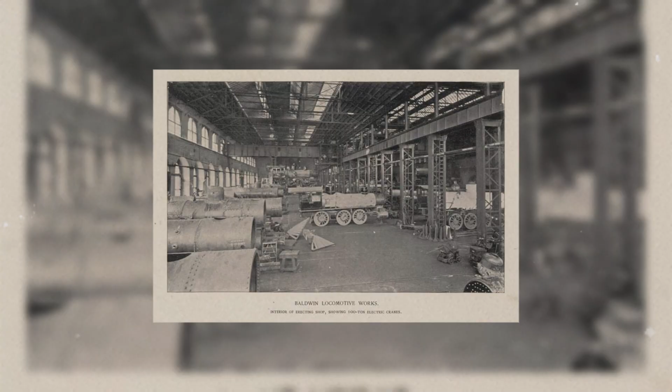Yet within a few short years, the sprawling cathedral of steam was reduced to rotting brick and silent, rusting iron. 18,500 livelihoods vaporized. How does a monopoly so powerful completely derail in the face of a single technological shift? Not because of war, not due to a lack of capital. They were destroyed by their own pride.

This is the story of Baldwin Locomotive Works. A brutal lesson on the devastating cost of arrogance when the future finally comes knocking.

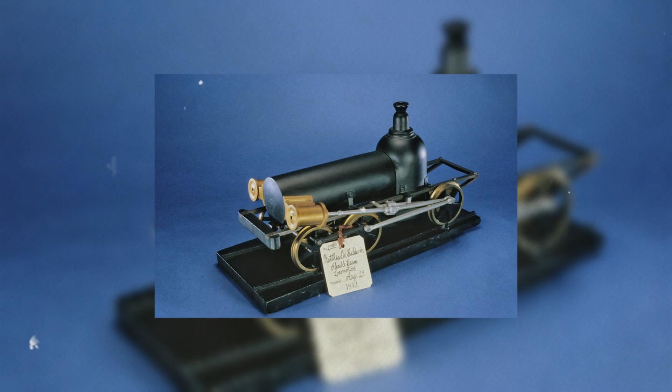The year is 1825, and the streets of Philadelphia are filled with the clatter of horse-drawn carriages and the quiet, meticulous work of craftsmen. In a small shop tucked away in the city, Matthias W. Baldwin sits hunched over a workbench. He is not a titan of industry. He is not an iron worker. He is a jeweler and a watchmaker. His world is governed by magnifying glasses, delicate tweezers, and the microscopic gears of pocket watches. He deals in fractions of a millimeter, obsessed with perfect, harmonious motion.

Yet, within a decade, this maker of delicate trinkets would unleash a mechanical leviathan that would alter the course of American history. The transformation from a watchmaker to a master of heavy industry began not with ambition, but with a practical problem. Seeking to expand his business into manufacturing bookbinders' tools and calico printing cylinders, Baldwin needed reliable power. Human muscle and animal labor were inconsistent.

Steam power was the emerging force of the era, but the stationary steam engines available on the market were clumsy, inefficient, and prone to breaking down. Offended by their crude engineering, Baldwin decided to build his own. In 1829, he constructed a small, stationary steam engine for his shop. It was an absolute marvel of precision.

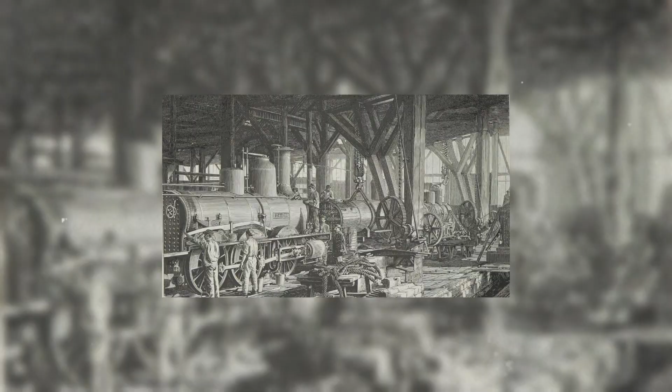Unlike the roaring, rattling machines of his contemporaries, Baldwin's engine hummed with the quiet, flawless rhythm of a well-crafted clock. It was so efficient and beautifully engineered that neighboring businesses began clamoring for their own. Almost by accident, Matthias Baldwin had become a builder of steam engines. But the true pivot of his life and the genesis of a transportation empire came a year later.

Across the Atlantic, the British were experimenting with a terrifying and wondrous new invention, the steam locomotive. Rumors of these iron horses reached America, capturing the public's imagination. In 1831, the Philadelphia Museum approached Baldwin with a novel request. Could he build a working miniature locomotive for an exhibition?

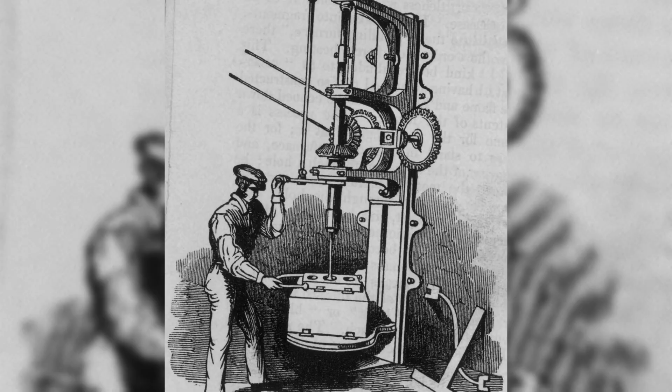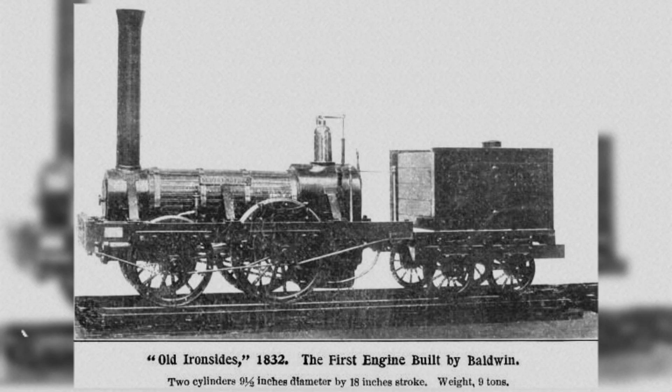Relying only on vague descriptions and crude sketches of British designs, Baldwin applied his watchmaker's precision to the task. He built a small, fully functional steam locomotive that pulled 2 passenger cars on a circular pine-board track inside the museum. It was a sensation. Crowds flocked to see it, mesmerized by the hissing, chugging miniature.

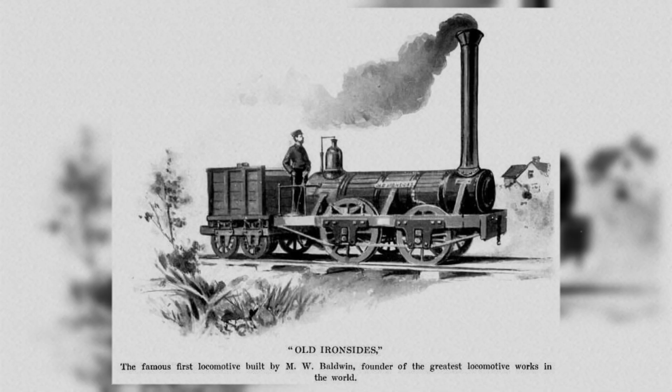Among those watching were the directors of the newly formed Philadelphia, Germantown, and Norristown Railroad. They were laying tracks, but they had a critical problem. They had no trains, relying instead on horses to pull carriages along the rails. They looked at Baldwin's toy and saw the future. They approached the jeweler with a staggering proposition. They wanted him to build a full-scale, operational steam locomotive.

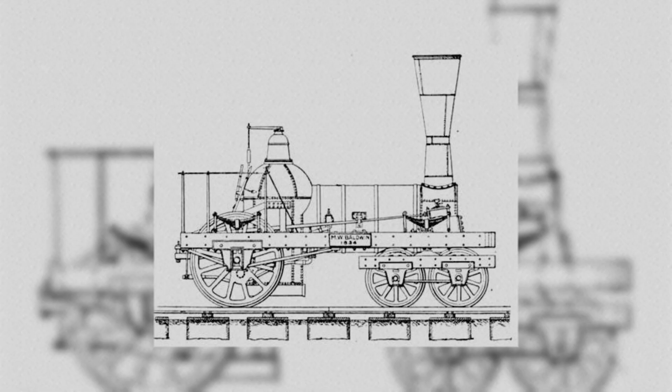It was a seemingly impossible task. The leap from a museum model to a multi-ton machine capable of hauling heavy loads over uneven terrain was monumental. In the early 1830s, America lacked the industrial infrastructure to build such a beast. There were no specialized machine shops. There were no standardized blueprints. There was not even a proper forge capable of casting the massive iron cylinders required.

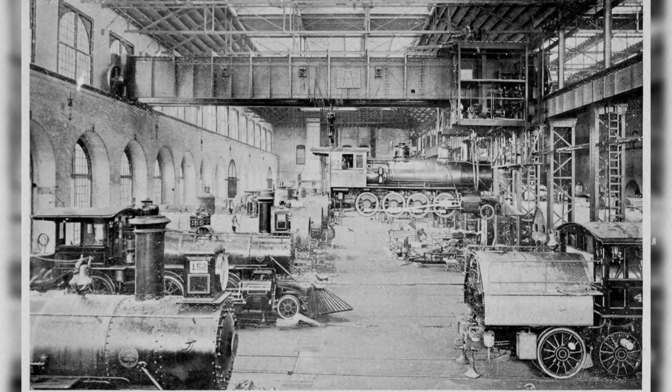Baldwin accepted the challenge, plunging into a grueling physical and mental ordeal. Because the necessary tools did not exist, he had to invent them. He trained blacksmiths to become specialized mechanics. He designed his own boring machines to hollow out the iron cylinders. He worked day and night in a cramped alleyway shop, struggling against the limitations of early metallurgy and primitive hand tools. The sheer physical toll of wrestling with massive iron components was a brutal contrast to the delicate watchmaking he had mastered.

Finally, on November 23, 1832, the machine was ready. He named it Old Ironsides. It weighed over 5 tons. It was a beautiful, terrifying amalgamation of iron, wood, and brass.

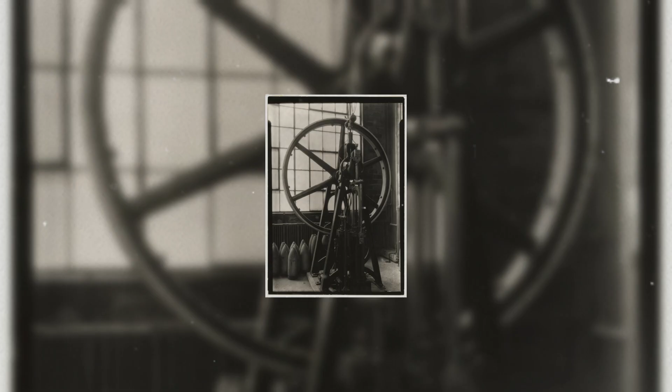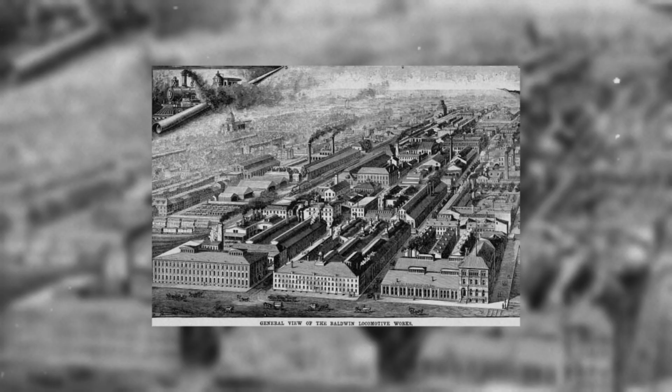On its trial run, things did not go smoothly. The day was damp, and the iron wheels slipped uselessly on the wet rails. The exhaust pipe was too small, choking the engine's draft. Yet with adjustments, the fire caught, the pressure built, and Old Ironsides moved. On subsequent runs, it achieved speeds of 28 miles per hour, an unimaginable velocity in a world accustomed to the walking pace of a horse.

Despite the triumph, the process had been a nightmare of logistical and engineering failures. Exhausted, out of pocket, and deeply frustrated by the sheer difficulty of the endeavor, Baldwin famously declared, "That is our last locomotive. I will never make another." But the undeniable thrill of seeing his creation conquer distance and time had taken root. He had proven that American ingenuity could rival the British masters.

He had taken the precision of a watchmaker and scaled it up to a monstrous, world-changing proportion. He would not stop at one. Matthias Baldwin had found his true calling. He abandoned jewelry and stationary engines entirely, dedicating his life and his shop to the perfection of the steam locomotive. In doing so, he embedded a unique DNA into his company, a fanatical commitment to custom craftsmanship and mechanical precision.

This obsession with quality would soon propel Baldwin Locomotive Works from a cramped alleyway into a sprawling industrial colossus, setting the stage for an era of unprecedented dominance. Matthias Baldwin did not live to see the true scale of the monster he had birthed. When he passed away in 1866, his company had already established itself as a premier builder of steam locomotives. But the decades that followed would transform the Baldwin Locomotive Works from a successful enterprise into a global monopoly.

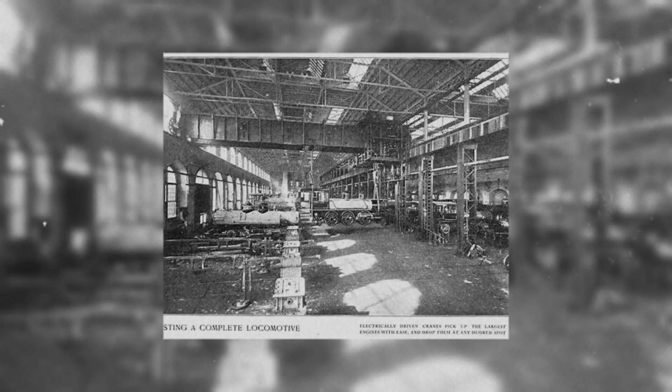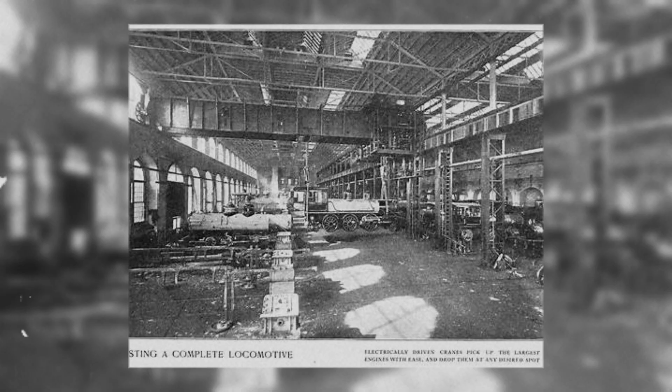A Baldwin locomotive chugging across the Russian steppes, the French countryside, or the mountains of Japan was the ultimate symbol of American industrial might. They reached a point where the name Baldwin was printed on over 70,000 locomotives globally. They were invincible. They were the heartbeat of global logistics.

But beneath the roaring triumph of the Eddystone plant lay a fatal, hidden flaw. The very thing that made Baldwin the undisputed master of its domain was quietly weaving the trap that would eventually destroy it. Eddystone was a masterpiece of hyper-specialization. Every square inch of the 600-acre facility, every massive overhead crane, every specialized boring machine, and every drop forge was designed exclusively for the creation of steam locomotives. The architecture of the buildings themselves was dictated by the sheer physical dimensions of steam boilers.

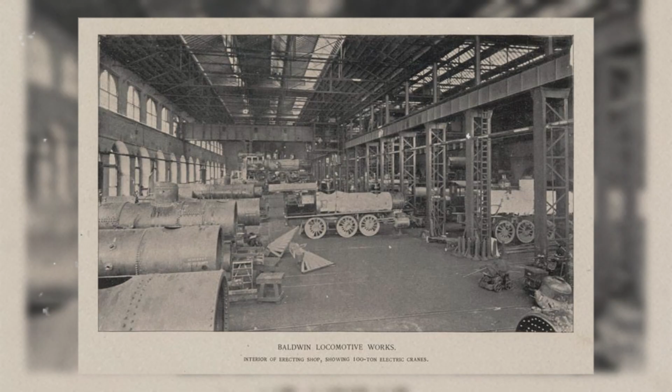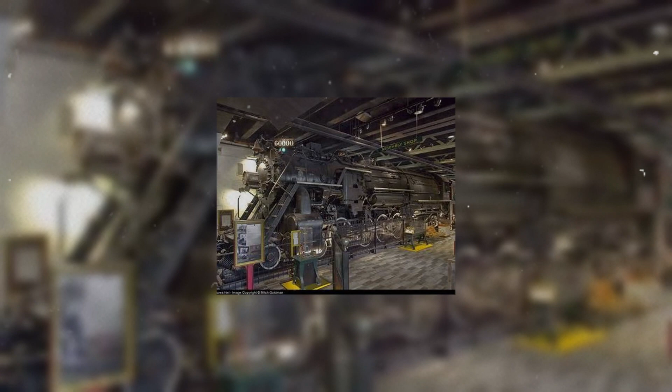More dangerously, the mindset of the entire organization, from the executives in the boardroom to the riveters on the shop floor, was completely calcified in the doctrine of steam. They believed that raw, brute force, generated by boiling water and burning coal, was the only way to move heavy freight. They viewed their product not merely as a machine, but as the pinnacle of human engineering, a living, breathing beast of burden that could never be replaced by something less primal.

They had built a fortress so massive, so incredibly optimized for a single technology, that it was utterly incapable of pivoting. Eddystone was a titan wearing an impregnable suit of iron armor. It was magnificent, it was terrifying, and it was entirely rigid. As the 1930s approached, a new, quieter sound began to echo in the distance. The low, steady hum of internal combustion. But within the deafening, triumphant roar of the Eddystone Cathedral, the leaders of Baldwin simply could not, or would not, hear it.

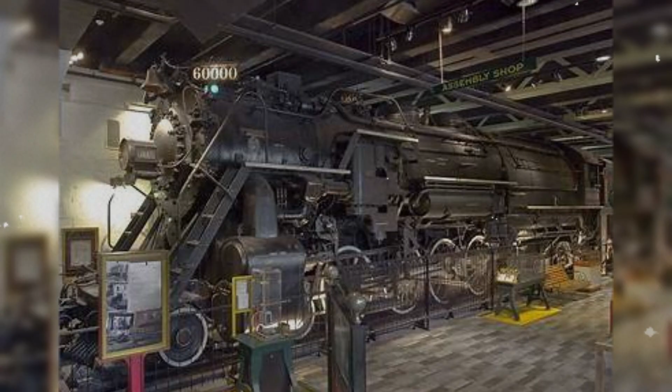The 1930s brought profound economic despair to America, but beneath the surface of the Great Depression, a quiet technological earthquake was taking place. While the mighty Eddystone plant continued to hammer away at massive iron boilers, filling the Pennsylvania sky with thick, black smoke, a very different kind of sound was emerging from the American Midwest. It was not the deafening, violent roar of escaping high-pressure steam, but the steady, rhythmic, almost surgical thrum of the internal combustion engine.

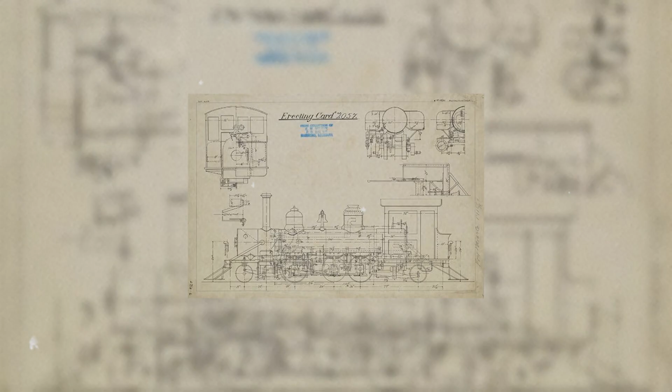General Motors, a titan of the rapidly expanding automotive industry, had begun looking beyond highways and turning its gaze toward the rails. In 1930, GM purchased the Winton Engine Company and the Electromotive Engineering Company, fusing them into a new, heavily funded subsidiary, the Electromotive Division, or EMD. This was a critical shift.

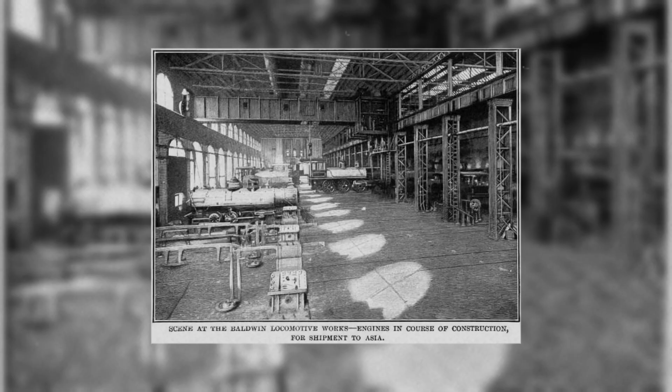EMD was not a traditional locomotive builder steeped in the romantic traditions of the railroad. They were a car company. They brought a cold, calculated mass production logic to heavy transit, a philosophy that was entirely alien to the bespoke craftsmanship of Baldwin. The true shockwave of this new philosophy hit the American public in the spring of 1934.

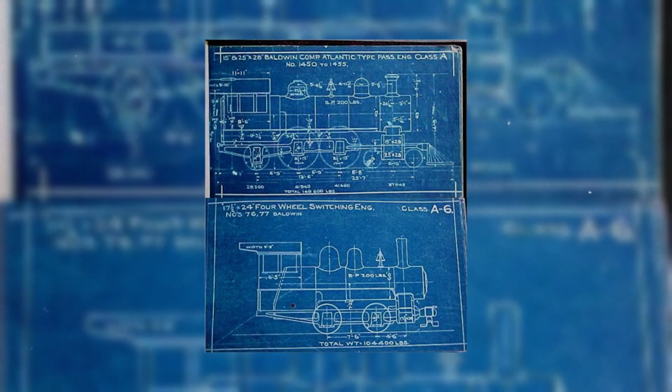The Chicago, Burlington, and Quincy Railroad debuted a machine that looked less like a train and more like a silver bullet dropped out of a science fiction novel. It was the Burlington Zephyr. Sheathed in gleaming, fluted stainless steel, the Zephyr was powered not by coal and water, but by a compact, highly efficient diesel-electric power plant.

On May 26, 1934, the Zephyr made a historic, non-stop, dawn-to-dusk dash from Denver to Chicago. It covered 1,015 miles in 13 hours and 5 minutes, effectively cutting the traditional steam-powered travel time in half. But the speed was not the most terrifying metric for the traditional locomotive builders.

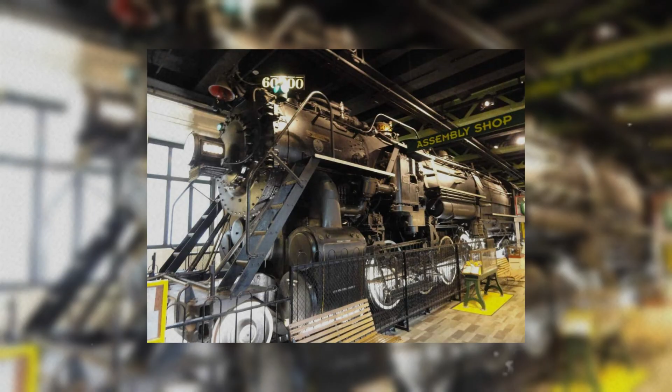It was the efficiency. The entire 1,000-mile journey cost a mere $14.64 in diesel fuel. For a steam locomotive to attempt that same run, it would have required frequent, time-consuming stops for tens of thousands of gallons of water, mountains of shoveled coal, and exhaustive mechanical lubrication at every division point.

Steam engines were inherently dirty, maintenance-heavy beasts. They required an army of ash pit workers, specialized boiler makers, and roundhouse mechanics just to keep them breathing. They spent a massive percentage of their operational lives sitting cold in the shop, undergoing legally mandated boiler washes and firebox repairs. The diesel, by contrast, offered something revolutionary: pure availability.

You turned a switch, and it was ready to work. There were no ashes to dump, no boilers to wash, no fires to carefully bank and maintain overnight. It was clean. It was precise. It was undeniably the future of transportation.

How did the undisputed kings of Eddystone react to this gleaming silver interloper? With profound, unshakable arrogance. Within the mahogany-paneled boardrooms and the cavernous drafting floors of Baldwin Locomotive Works, the men who had spent their lives mastering the violent alchemy of boiling water looked at the diesel engine and sneered. To them, the Zephyr was a public relations gimmick.

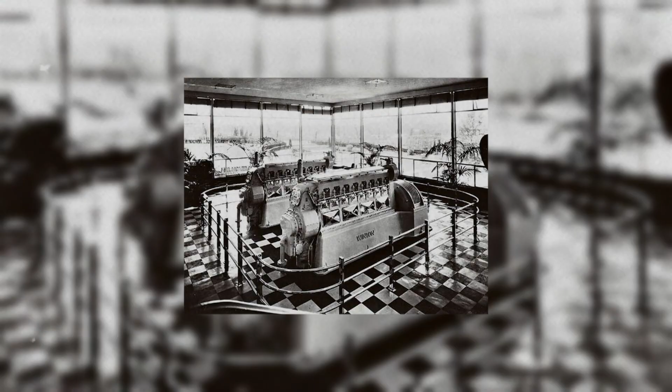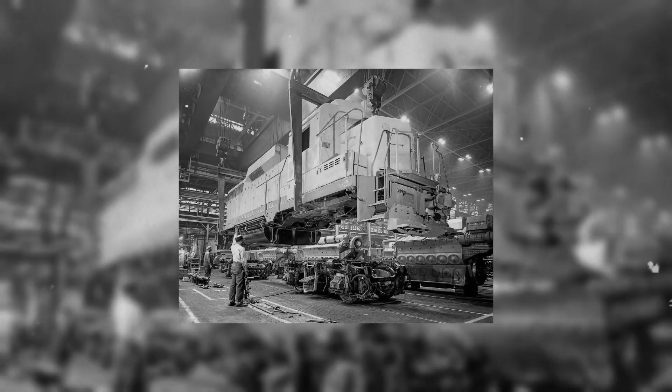It was a fragile, overly complicated toy fit only for lightweight, high-speed passenger trains, but entirely incapable of doing the real work of America. The prevailing, unquestioned dogma at Baldwin was that true railroading, the brutal, grinding labor of hauling 10,000-ton coal drags up steep mountain grades, required raw muscular mass. The Baldwin executives believed, with a religious fervor, that the intricate electrical circuits, delicate fuel injectors, and complex wiring of a diesel-electric locomotive could never survive the punishing daily abuse of heavy freight service.

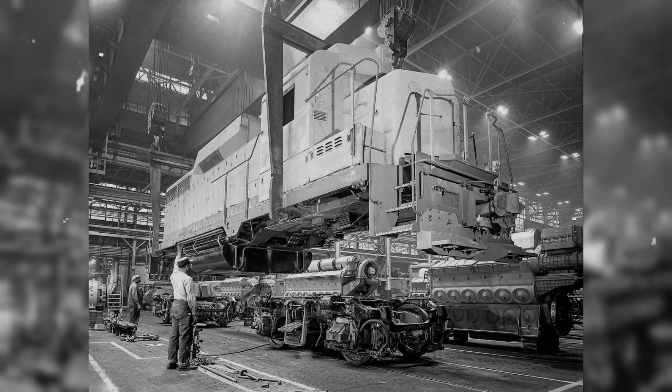Furthermore, the threat of diesel assaulted the very foundation of Baldwin's business model. For nearly a century, Baldwin had operated on the philosophy of bespoke, custom engineering. Every railroad wanted its own uniquely designed steam engine, tailored exactly to its specific track radii, bridge weight limits, and regional coal types. The engineers at Baldwin prided themselves on being able to design and build anything a railroad requested.

EMD, however, was offering standardized, off-the-shelf models. You bought what they made. Baldwin's leadership firmly believed that veteran railroad executives would never accept generic, mass-produced machines. They actively mocked the new technology.

The brilliant but aging architects of Baldwin's supremacy publicly dismissed the threat, assuring investors and railroad men alike that steam would reign supreme until the end of time. Instead of pivoting, they doubled down on their own magnificent obsolescence. They poured millions of dollars and countless engineering hours into developing even more massive, more complicated steam locomotives, experimental duplex drives, and steam turbine engines that were undeniable mechanical marvels, but absolute economic nightmares to maintain.

The engineers at Baldwin were men of iron and steam. They understood direct mechanical linkage, steam pushing a piston, driving a steel rod, turning a massive wheel. Pure, visible, visceral physics. The idea of an engine generating unseen electricity to turn traction motors felt like an unnecessary, weak middleman. They were plugging their ears against the ticking clock, willingly blinding themselves to the data that proved diesel's superior economic efficiency. The trap of their own century-long success had closed perfectly around them. Their pride had rendered them inflexible.

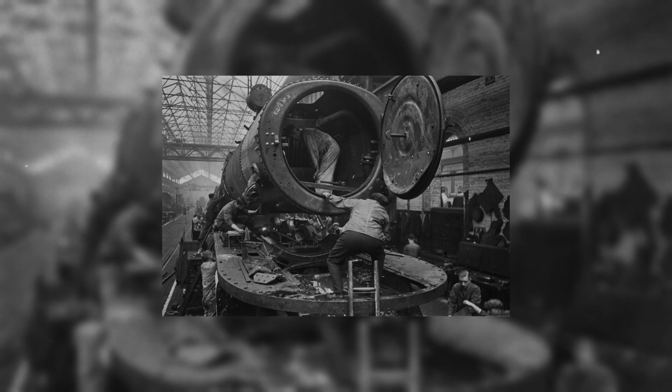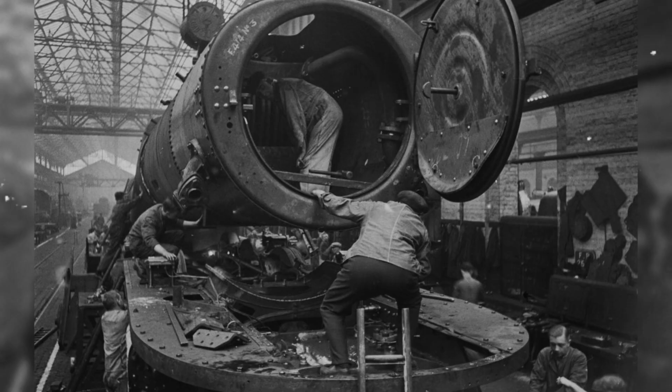The Eddystone plant, which had been suffering through the lean years of the Great Depression, was suddenly resurrected to its most terrifying and magnificent scale. The foundries burned 24 hours a day, 7 days a week. The workforce swelled back into the tens of thousands. The sky above Pennsylvania turned black with coal smoke as a relentless parade of heavy, articulated steam behemoths rolled out of the erecting shops. Baldwin was churning out massive engines not just for American railways, but for the Soviet Union, for Great Britain, and for the United States Army Transportation Corps.

To the executives sitting in the mahogany boardrooms of Philadelphia, the diesel threat of the 1930s now seemed like a foolish, distant memory. The sleek Silver Zephyr was a cute novelty, but when the fate of the free world was on the line, the United States government had turned to the brutal, undeniable muscle of Baldwin steam. The order books were overflowing. Revenues were shattering historical records.

By 1944, as the tide of the war turned definitively in favor of the Allies, the atmosphere within Baldwin's leadership was one of supreme, unshakable triumph. In their minds, the debate was settled. Steam had won. At a lavish executive gathering, senior management raised glasses of expensive champagne, toasting to record profits, overflowing production quotas, and the glorious return of their golden age. They clinked their glasses to the roaring fires of Eddystone, utterly convinced that their century-old dynasty was secure for another 100 years.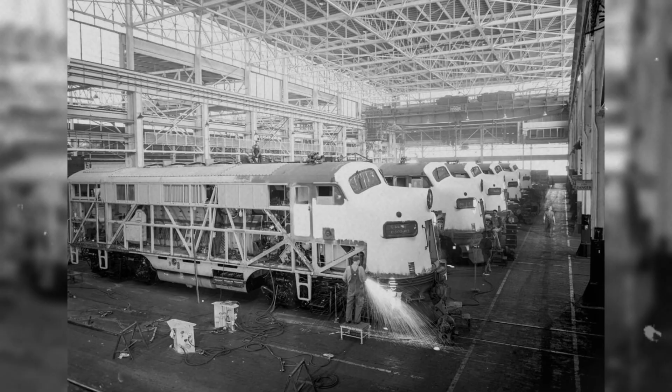When Japan formally surrendered in September 1945, the illusion of Baldwin's wartime triumph shattered almost overnight. The lucrative government contracts for heavy steam engines vanished instantly. The domestic railroads, physically exhausted and financially enriched by the war traffic, were desperate to modernize their fleets. They did not want to replace their worn-out steam engines with new steam engines. They had seen the incredible efficiency, the massive fuel savings, and the minimal maintenance of the EMD diesels that had operated during the war. The railroad executives abandoned Eddystone and flocked to Illinois.

The leaders of Baldwin Locomotive Works woke up in the autumn of 1945 to a terrifying reality. The war had not saved them. It had anesthetized them. The booming production numbers had served as a narcotic, blinding them to the truth. While they had spent 4 grueling years perfecting the technology of the past, their greatest rival had been quietly, legally, and brilliantly handed the keys to the future. The champagne had barely dried in the Baldwin boardrooms when the catastrophic truth finally set in. The era of steam was dead, and they were caught completely empty-handed. The awakening was brutal.

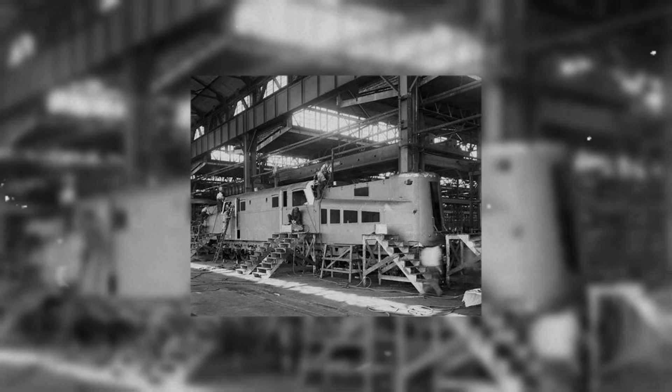By 1946, the massive backlog of wartime steam orders had evaporated, and the American railroad industry made its intentions violently clear. They were not returning to the heavy, ash-choked days of steam. They wanted the sleek, efficient, turnkey power of diesel-electric locomotives. Electromotive Division, having spent the war years perfecting their standardized assembly lines, was positioned to immediately fulfill that demand.

Baldwin Locomotive Works, the undisputed titan of the previous century, was caught completely flat-footed. Panic, unfamiliar and cold, set into the executive suites of the Eddystone plant. The men who had arrogantly dismissed the internal combustion engine a decade earlier were now forced into a humiliating, desperate scramble for survival. They had to pivot, and they had to do it immediately.

But a century of institutional muscle memory cannot be erased overnight. Baldwin was not a company designed to build delicate, highly calibrated electrical machines. They were a company built on the brutal, heavy physics of iron, fire, and water. Their entire massive infrastructure, the drop forges, the boiler shops, the colossal overhead cranes, was optimized for steam.

To bridge the catastrophic gap in their expertise, Baldwin attempted a rushed, messy marriage of convenience. They utilized diesel prime movers from their subsidiary, De La Vergne, and contracted the Westinghouse Electric Corporation to supply the vital traction motors and electrical control systems. On paper, it seemed like a formidable alliance of heavy industry. In reality, it was a logistical and cultural nightmare.

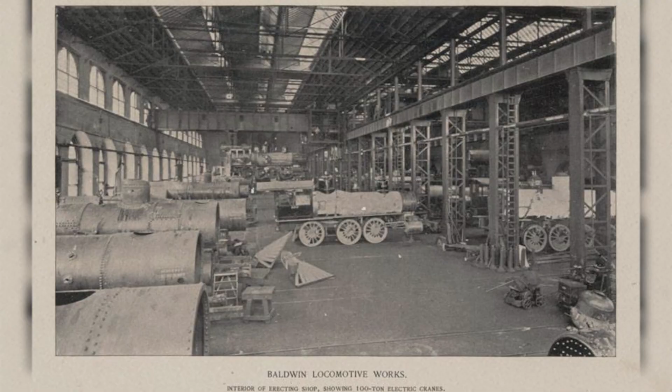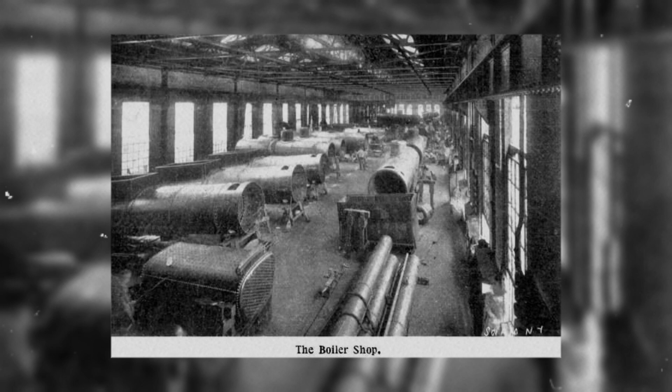The most profound tragedy of this pivot unfolded on the shop floor of the Eddystone plant. For generations, the Baldwin workforce had been composed of master artisans of heavy metallurgy. These were boilermakers, blacksmiths, and foundrymen who understood the language of glowing steel and high-pressure steam. They diagnosed mechanical issues by the sound of a rhythmic clank or the smell of hot lubricating oil.

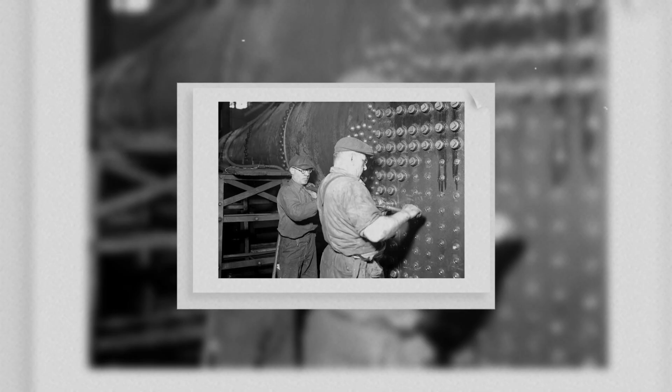Suddenly, these veteran mechanics were handed complex electrical schematics. They were asked to abandon their heavy tools and work with delicate wiring harnesses, temperamental voltage regulators, and sensitive fuel injectors. The transition was agonizing. A master boilermaker, a man who could seamlessly rivet a high-pressure vessel capable of containing hundreds of pounds of steam, was essentially reduced to an unskilled laborer when faced with the baffling intricacies of a diesel-electric control panel.

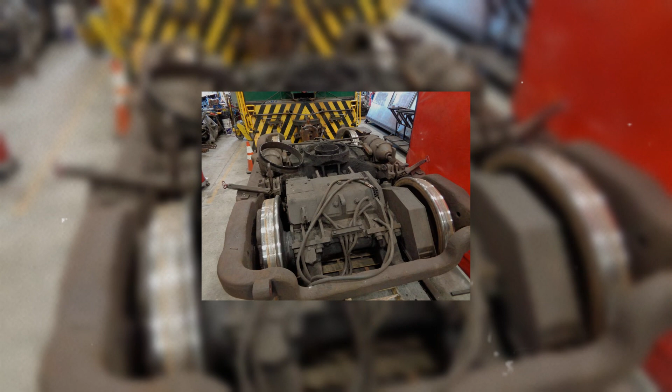The factory floor, once a symphony of organized, rhythmic pounding, descended into an atmosphere of anxious confusion. They were attempting to force a modern, precision-engineered machine through a manufacturing process built for the raw, brute force of the 19th century. The resulting locomotives reflected this profound internal conflict. They were massive, heavily built, and intricately complex. Machines designed by steam engineers desperately trying to speak the language of diesel.

When Baldwin's new diesel locomotives finally rolled out of Eddystone and onto the main lines, the results were disastrous. Driven by their century-old philosophy of custom engineering, Baldwin refused to adopt the standardized, mass production model that was making EMD so successful. Instead of offering a few reliable, interchangeable models, Baldwin offered a bewildering array of custom-built diesels. They built massive, terrifyingly complex machines like the Centipede, a hulking locomotive with 24 wheels, 2 separate diesel engines, and a sprawling, labyrinthine electrical system.

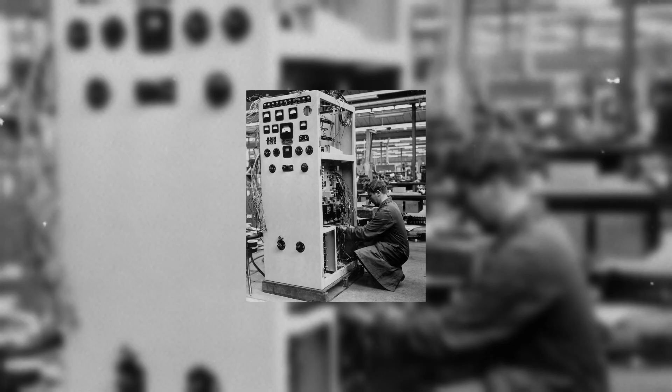To the traditional railroad executives, these machines looked impressive, but to the maintenance crews working in the rail yards, they were an absolute nightmare. Baldwin's diesels were plagued by constant electrical gremlins and mechanical failures. Because they were custom-built, replacement parts were incredibly difficult to source. If a Westinghouse electrical relay failed on a Baldwin locomotive in a remote rail yard in Texas, the train was out of service for days, sometimes weeks, waiting for a specific, non-standardized part to be shipped from Pennsylvania.

Furthermore, the internal layout of the machines was notoriously cramped and hostile to mechanics, reflecting the fact that they were designed by draftsmen who didn't fully understand the maintenance realities of diesel-electric power. By contrast, EMD's locomotives were designed like automobiles. Their parts were universally standardized. A traction motor from an EMD locomotive in New York was identical to one in California. If an engine failed, a railroad maintenance crew could swap out the entire prime mover in a matter of hours, keeping the train on the tracks and generating revenue.

The economic reality was undeniable, and the market response was swift and merciless. Railroads that had been fiercely loyal to Baldwin for nearly 100 years began to defect. The most devastating blow came from the Pennsylvania Railroad. The Pennsy was the largest railroad in the world, and for decades, it had been Baldwin's most important and captive customer. The two Pennsylvania-based giants had been locked in a symbiotic relationship, building some of the most famous steam locomotives in history together.

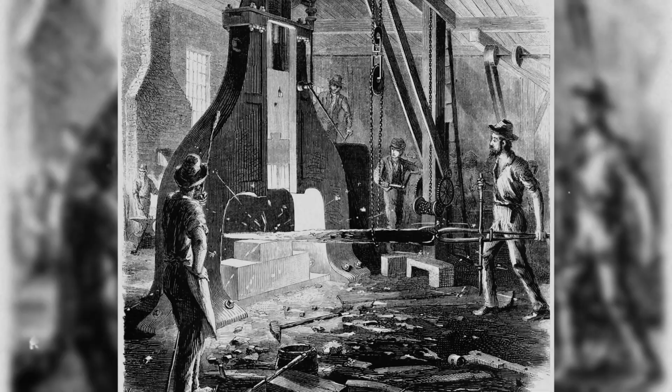forever. But the corporate restructuring was merely a tourniquet. It did nothing to cure the underlying disease. The core, fatal problem remained utterly unsolved. BLH still did not possess a reliable, competitive diesel locomotive, and the domestic railroad market was already fiercely saturated by EMD and the American Locomotive Company.

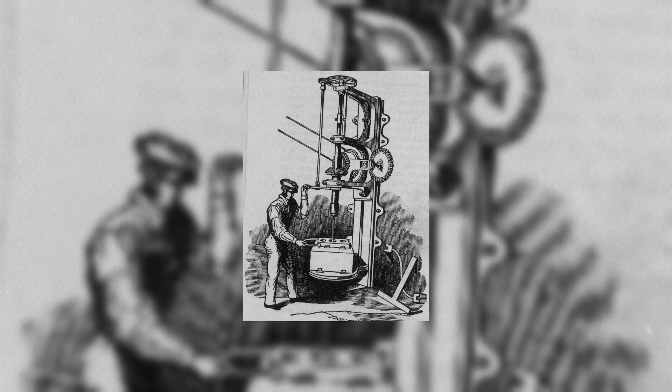Realizing that they could no longer survive as a dedicated railroad supplier, the executives at BLH initiated a frantic, scattershot strategy of diversification. If the railroads no longer wanted their machines, they would use the massive foundries and heavy tooling of Eddystone to build anything that required thick steel and deep engineering.

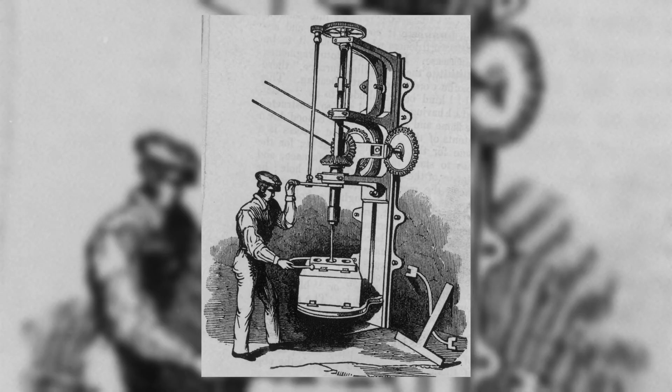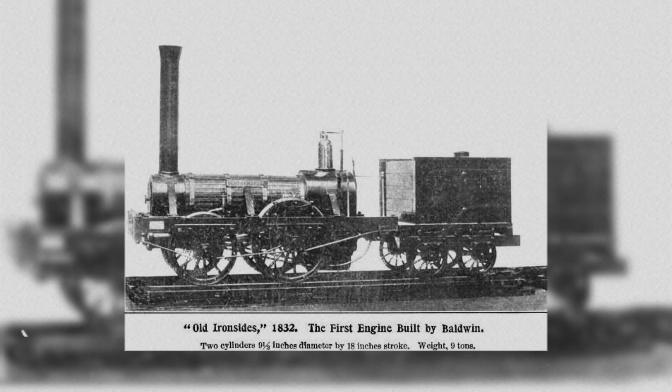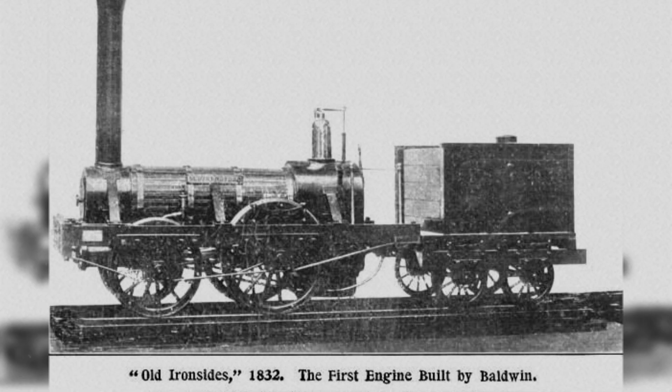The mighty Locomotive Works pivoted to manufacturing heavy earth-moving equipment, massive hydraulic turbines for hydroelectric dams, ship propellers, road graders, and colossal metal-forming presses. They were desperately trying to feed a beast that possessed an insatiable, ruinous appetite for work. But in doing so, they stripped the company of its soul. The men who had proudly viewed themselves as the world's finest builders of motive power were now relegated to stamping out generic, faceless industrial hardware.

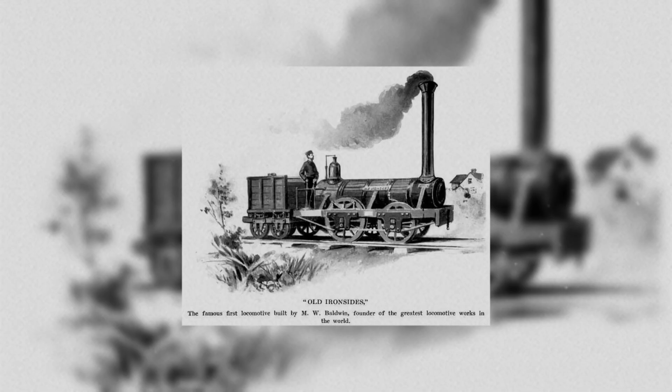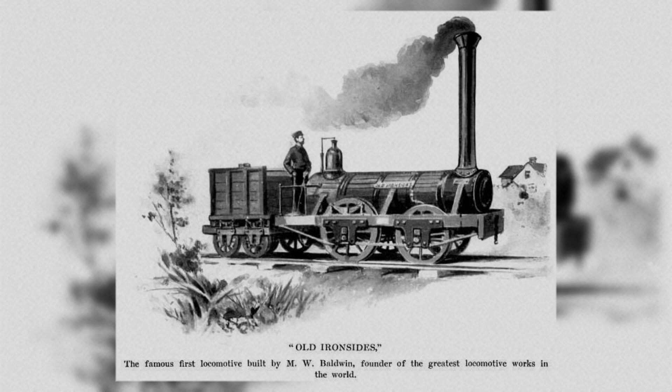Despite the frantic pivot to heavy industrial machinery, the unforgiving mathematics of Eddystone simply did not work. Building a custom hydroelectric turbine was a profitable endeavor, but it was a slow, meticulous process that only required a fraction of the manpower needed to run a high-volume locomotive assembly line.

The mighty army of Eddystone, which had once numbered 18,500 strong, suddenly morphed from an asset into a massive, unsustainable liability. The layoffs, when they came, were not the cyclical, temporary furloughs that the workforce had endured during the Great Depression. These were permanent, soul-crushing terminations. Generation after generation of Baldwin men were handed pink slips and shown the gate.

Fathers who had proudly walked their sons into the foundry, passing down the sacred, tactile knowledge of heavy metallurgy, now had to watch those same sons pack their toolboxes and walk out into a cold, unforgiving post-war economy. The psychological devastation was profound.

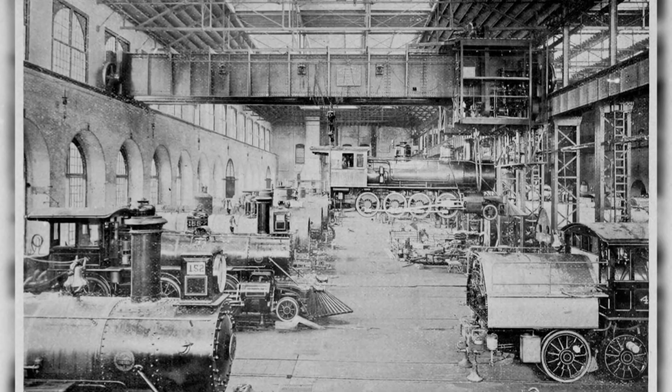These were highly specialized artisans, master boilermakers, steam valve technicians, and iron casters. Their skills, honed over decades in the fires of Eddystone, were suddenly rendered completely useless in the streamlined electrical world of the 1950s. They were not just losing their livelihoods, they were being stripped of their identities. The culture of Eddystone shattered completely.

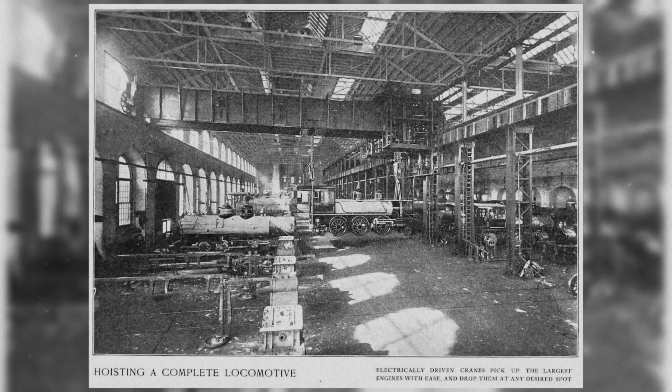The fierce camaraderie and pride that had once been forged in the deafening roar of the erecting shops were replaced by a toxic, pervasive atmosphere of fear and suspicion. Who would be cut next? Which shop would go dark today? The men worked in the shadows of empty bays and silent cranes, watching their beloved empire slowly cannibalize itself.

To compound the misery, their crucial electrical partner, Westinghouse, recognized the sinking ship. Tired of absorbing the warranty costs for Baldwin's temperamental diesel-electric designs, Westinghouse announced it would cease producing heavy traction equipment for the rail market. BLH was suddenly left without a reliable supplier for the very components they had failed to master. They were forced to buy electrical gear from General Electric, essentially handing money to a direct competitor just to finish their remaining meager orders.

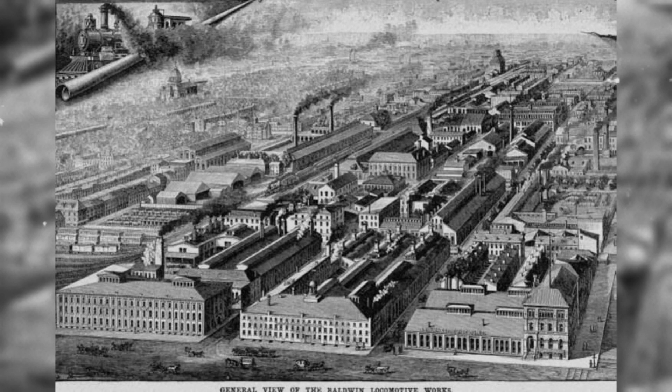To stop the relentless financial hemorrhaging, the BLH Board of Directors was forced to carve up the legacy piece by bleeding piece. The indignity of the auctions was perhaps the most painful chapter for the veteran workers. Men who had spent 30 years operating a specific massive Niles boring mill watched as auctioneers tagged their machines with numbered stickers. The tools that had bored the cylinders of the glorious wartime engines were sold as scrap iron to the highest bidder. Vast parcels of the sprawling Eddystone real estate were quietly liquidated to outside developers and lesser manufacturers. The Cathedral of Steam was being actively looted by its own caretakers just to keep the lights on for another quarter.

By the mid-1950s, the locomotive division, the historic heart, soul, and very reason for Baldwin's existence, was operating as a corporate zombie. They were reduced to building a meager trickle of specialized industrial switchers and lightweight export models for foreign markets that couldn't yet afford EMD's premiums. The lucrative American mainline freight market was entirely gone, completely surrendered to the competition. The proud Baldwin Builders plate, once a universal symbol of unmatched, terrifying power, had been reduced to a relic of a dying breed. The end was no longer a terrifying possibility to be fought off. It was simply a scheduled certainty waiting for a date.

In the autumn of 1956, the cold, unforgiving mathematics of corporate survival finally caught up with the romance of the rails. The board of directors of the Baldwin Lima Hamilton Corporation convened in a quiet room, far removed from the soot and sweat of the factory floor. They reviewed the ledgers, looked at the dismal market share projections, and made the only logical decision left to them. 124 years after Matthias Baldwin meticulously crafted Old Ironsides in a cramped Philadelphia alleyway, the company officially announced the termination of its locomotive division. They were surrendering. The company that had built over 70,000 locomotives, the company that had essentially forged the mechanized spine of the American continent, was throwing in the towel.

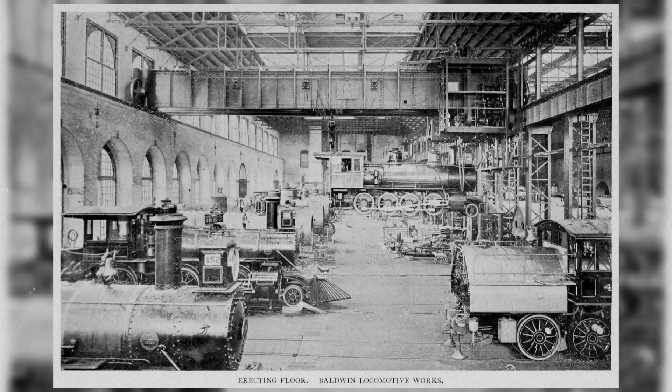When the news reached the Eddystone plant, it did not arrive with a dramatic crash. It settled over the massive 600-acre complex like a thick, suffocating blanket of heavy snow. The men on the shop floor had known this day was coming. They had watched the agonizing, years-long decline. They had survived the humiliating layoffs and witnessed the auctioning off of their most prized machinery. But knowing the end is near does not numb the profound shock of the actual execution.

The final weeks at Eddystone were a surreal, deeply haunting experience. This was a facility designed for maximum, deafening noise, the concussive thud of drop forges, the shrieking grind of massive lathes, the hiss of testing valves, and the shouted orders of thousands of men working in perfectly orchestrated chaos. Now the overwhelming sensation was a hollow, echoing silence. As the final meager orders of industrial switchers were slowly bolted together, bays that had once housed dozens of massive steam boilers simultaneously went dark. The overhead cranes, capable of lifting hundreds of tons of iron, sat frozen on their tracks like petrified steel skeletons. The great furnaces, which had burned continuously for decades, were allowed to burn out, leaving behind nothing but cold, gray ash.

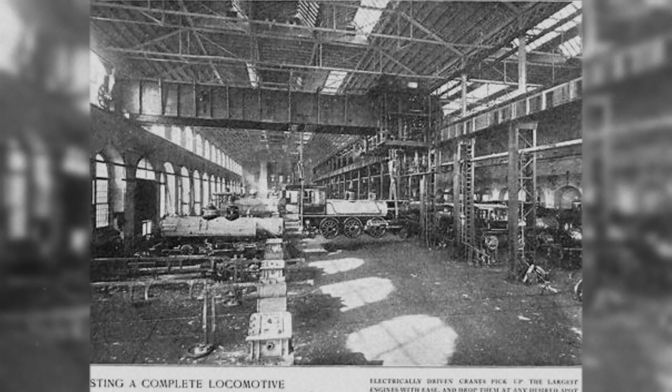There were no marching bands. There was no champagne christening. There were no politicians giving grand speeches about American industrial might. When the final whistle blew at the end of the shift, the remaining workers gathered along the rails leading out of the great erecting shop.

They stood shoulder to shoulder, their faces stained with decades of permanent soot, the brims of their canvas caps pulled low. They watched in absolute reverent silence as the final machine slowly rolled out of the heavy bay doors. The low rumble of its diesel engine echoed against the brick walls, a stark contrast to the violent, breathing chuff of the steam engines that had built this empire.

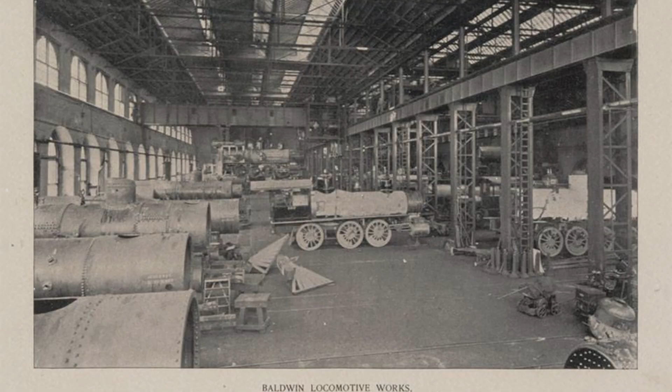As the locomotive cleared the building and rolled out into the gray Pennsylvania afternoon, the massive iron doors of the Eddystone erecting shop were slowly pulled shut behind it. The heavy metallic clank of the doors locking into place resonated across the empty yard. It was the sound of a century of dominance, coming to a hard, unforgiving stop.

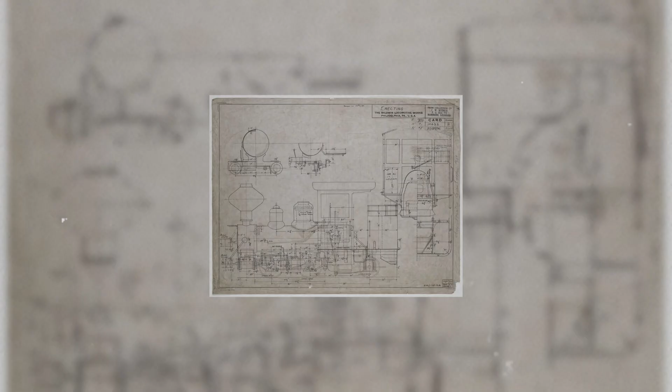The undisputed king of the rails was dead. The fires were out, the men were gone, and the Cathedral of Steam was abandoned to the ghosts of its own magnificent past. The silence that descended upon the Eddystone complex in the winter of 1956 was not a peaceful quiet. It was the heavy, suffocating silence of a freshly sealed tomb.

For over a century, the name Baldwin had been synonymous with the deafening, earth-shaking roar of American progress. Now, the 600-acre fortress, once the most productive locomotive manufacturing plant on the face of the earth, lay completely paralyzed. Without the constant, blistering heat of the blast furnaces, the massive brick erecting shops grew freezing and damp.

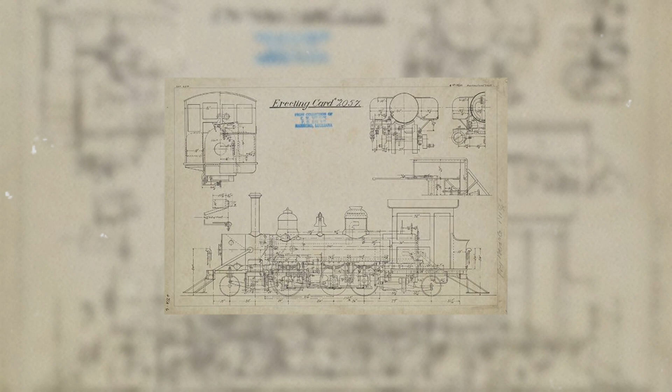The 100 miles of internal railway tracks, once polished silver by the ceaseless friction of heavy steel wheels, quickly succumbed to the aggressive creep of brown rust and encroaching weeds. The colossal overhead cranes, which had effortlessly hoisted 200-ton boilers, hung motionless in the dim, cavernous rafters, like the skeletal remains of extinct iron beasts.

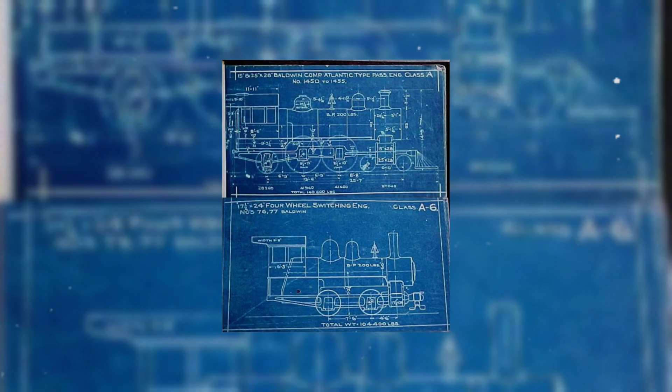But the true tragedy of Baldwin's collapse was not the rusting of its machinery. It was the devastating human diaspora it triggered. When Eddystone finally closed its locomotive bays, it didn't just terminate jobs, it vaporized an entire socio-economic ecosystem. For decades, the surrounding communities in Delaware County had existed in a symbiotic orbit around the plant.

Local diners, taverns, hardware stores, and boarding houses relied entirely on the massive, three-shift payroll of the Baldwin workforce. When the paychecks stopped, the economic hemorrhage spread outward with ruthless efficiency. Storefronts along the nearby avenues were quietly boarded up. Families who had lived in the shadow of the great smokestacks for 3 generations were suddenly forced to pack up and scatter, migrating across the country in a desperate search for heavy manufacturing work that was rapidly vanishing.

The highly specialized Baldwin men, the master boilermakers, the drop forge operators, the steam valve technicians, found themselves cast adrift in a post-war economy that no longer valued their tactile, brutal artistry. They had spent their lives mastering the alchemy of fire and water, only to realize that the world had irreversibly moved on to the clean, sterile logic of electrical circuits and diesel fuel. Their unmatched expertise, once the proud backbone of the American industrial machine, had been rendered completely obsolete.

As for the corporate entity itself, the Baldwin-Lima-Hamilton Corporation limped onward for a few more years, a hollow shell of its former glory. It continued to produce construction equipment and heavy industrial components, but the soul of the company had been violently amputated. Through a series of increasingly degrading corporate acquisitions in the 1960s and 1970s, being passed from a meatpacking conglomerate to a bus company, the once mighty Baldwin name was systematically erased from the ledger of American commerce.

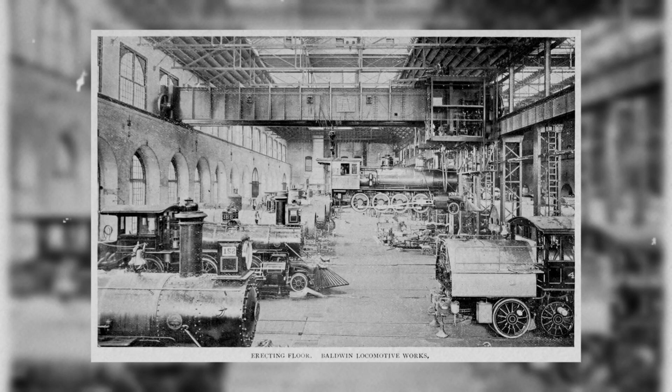The silent, vanished empire of Eddystone stands today as a profound and terrifying warning to any modern titan of industry. It is a brutal reminder that no monopoly is permanent, no market dominance is sacred, and no company is simply too big to fail. In the relentless, unforgiving march of technological progress, arrogance is the heaviest anchor, and the future has absolutely no mercy for those who refuse to adapt.

The story of Baldwin Locomotive Works is far more than a mere footnote in the history of American transportation. It serves as a profound psychological study of corporate momentum and institutional blindness. It asks a terrifying question of any wildly successful enterprise. At what point does your greatest strength calcify into your fatal weakness? For over a century, Baldwin's absolute strength was its unparalleled mastery of steam, fire, and iron. They built an impregnable, 600-acre fortress at Eddystone, staffed by an army of highly specialized artisans.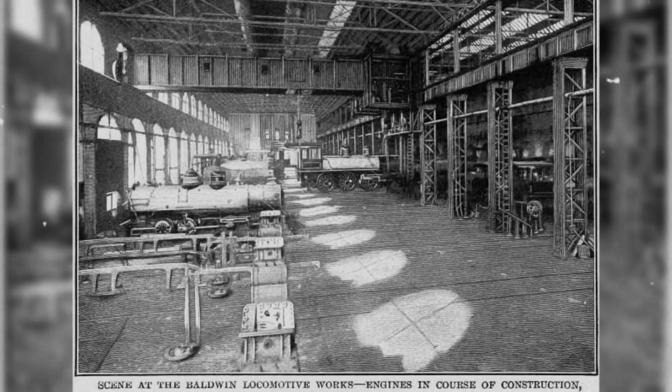But that magnificent fortress became a prison the very moment the world decided it no longer wanted to travel by steam. The executives sitting in Philadelphia were not completely blind to the changing times. They simply refused to look. They stared directly at the sleek, highly efficient diesel engines of the future and consciously chose the comforting, thundering roar of their own past. They prioritized their century-old pride over the cold, undeniable mathematics of progress.

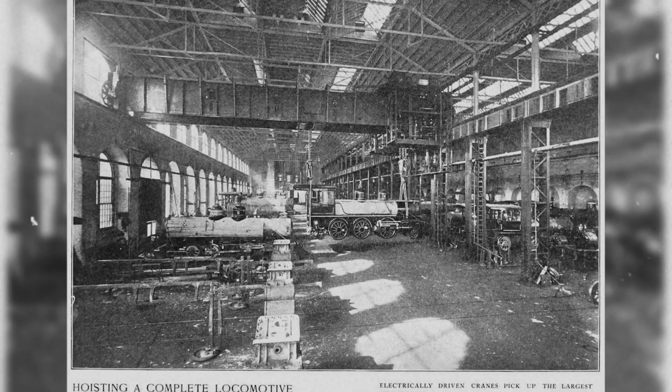The ultimate tragedy of Baldwin is deeply, painfully human. The true cost of their executive arrogance wasn't just measured in plummeting stock prices, lost market share, or the shuttering of massive brick buildings. The toll was paid by the 18,500 men and women whose generational, unmatched skills were abruptly rendered completely worthless. It was paid by the vibrant, working-class communities that quietly evaporated into the wind when the great furnaces finally went cold.

Technological progress is a ruthless, unsentimental engine. It does not respect legacy. It does not care how many bridges your company helped build, how many continents you connected, or how many global wars your machines helped win. It only asks one unforgiving question: what can you do for the future? When the time came, the undisputed king of the rails simply had no answer.

As we look at the modern titans of industry today, the sprawling tech giants, the automotive empires, and the global conglomerates, the silent ghost of Eddystone whispers a crucial, timeless warning. The moment you believe you are too massive to fail, the moment you stop listening to the quiet, disruptive hum of innovation because your own engines are too loud, your collapse has already begun.